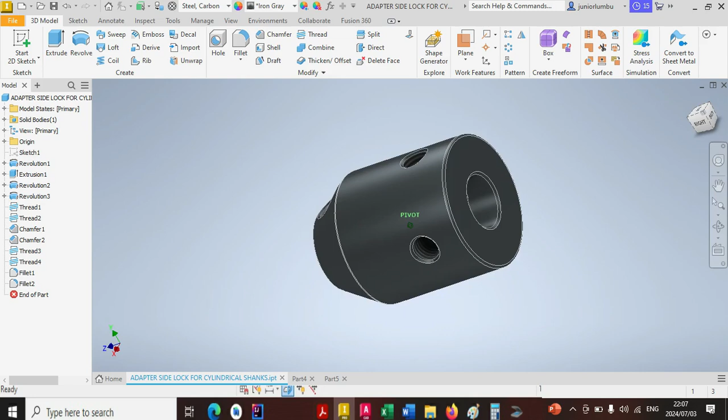Let's draw this adapter side lock in front of us. Our dimensions are in millimeters. So what we're gonna do is we're gonna come on new there. We go metric, standard millimeters, then say create.

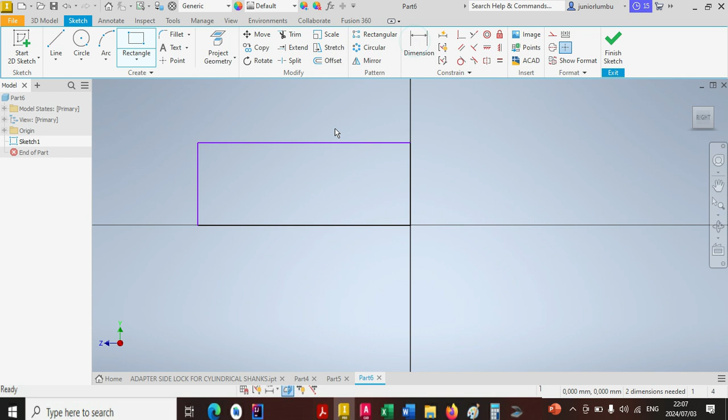In here we are going to start with a rectangle. So there is our rectangle. So from there up to there, and then we need to make sure that this one here is 40 millimeters. Good. And that one needs to be 15 millimeters.

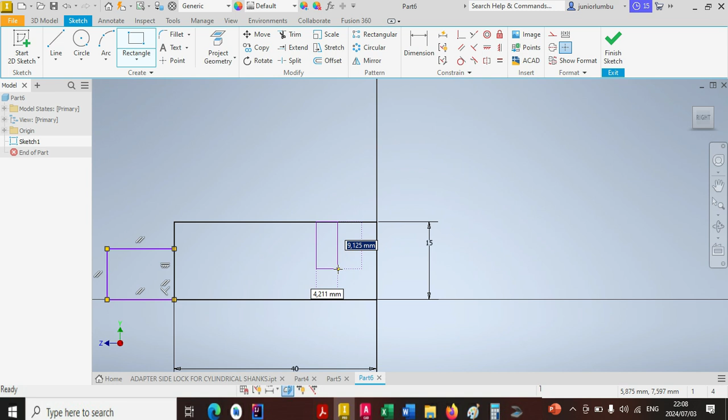All right. Now that I have that in place, I'm gonna come for another rectangle. So up to there. There is my rectangle, and another one here. There we go, without any constraint. Okay. And another one coming from here up to there. Now that I have that, I'm going to give dimensions.

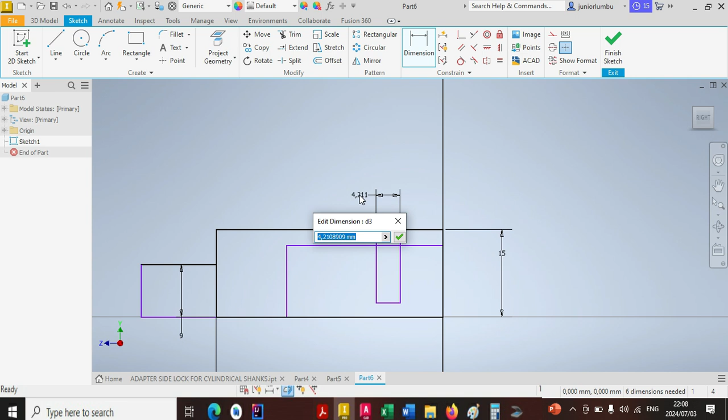So from there to that one, I need to have 9 millimeters. Okay. And this one here needs to be 3 millimeters. So 3. All right. And that one here needs to be 25 millimeters. So 25. Good. And now from here to there, I need to have 6 millimeters.

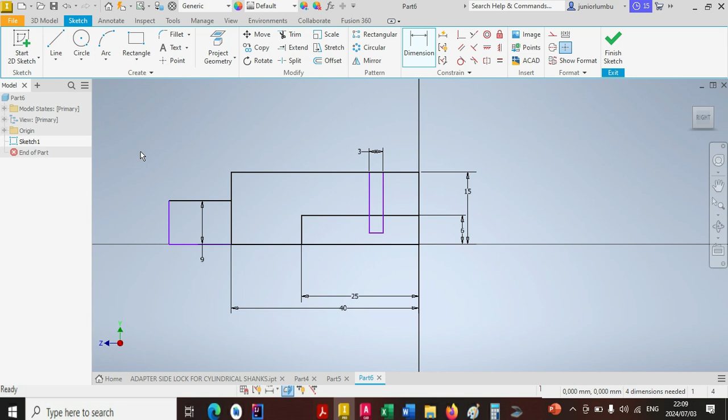All right. So now I'm gonna come for this straight line here. There is my straight line, and I'll make sure that from here to there I have 10 millimeters. 10 millimeters it is, and this one here needs to fall on that one like that. Now that I have that in place, I'm now gonna come for this

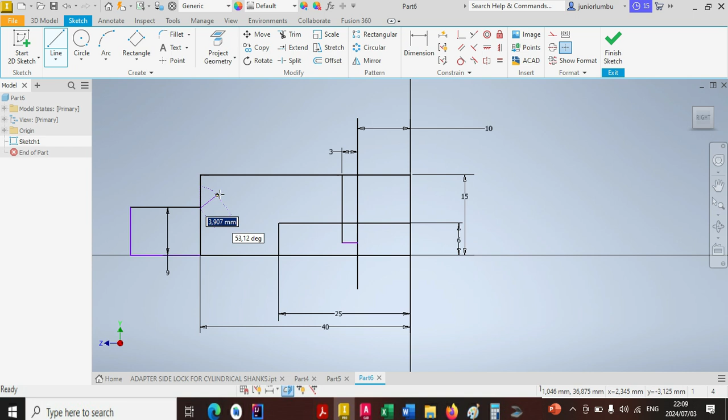rectangle here. So now first I need to come for this line, then I'm gonna come for the rectangle after. So there's my line. I'll make sure that from here to there I have 30 degrees. Good. That I have that one there, and from here to there I need to have 9 millimeters.

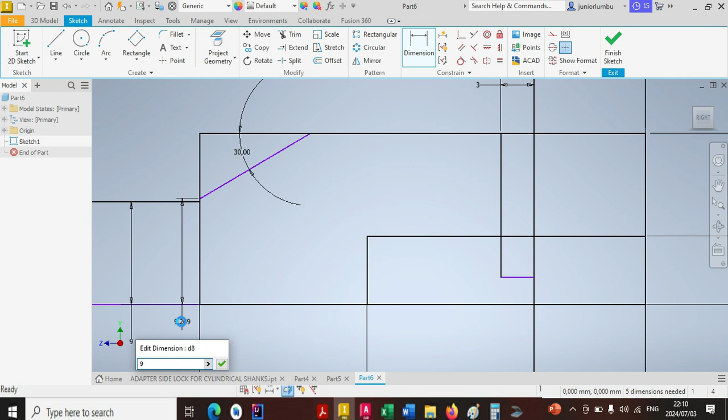Okay, that has moved up. Let's make sure that between this one and that one we have 0. Good. 9 millimeters, just like that. Okay, then I'm gonna come for this rectangle. So this rectangle is coming there. Okay, there we go, and then coming like this.

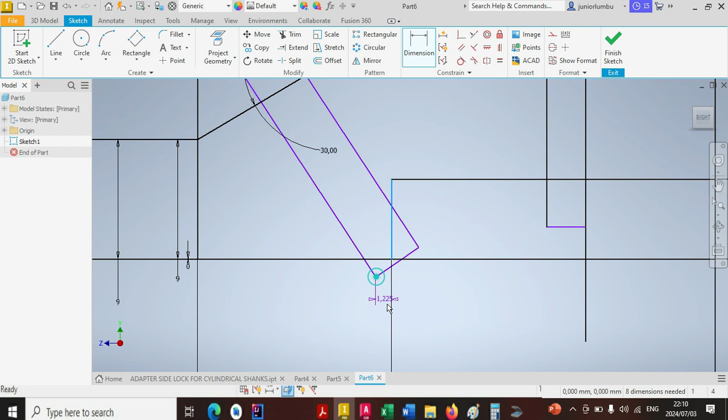Right. Okay, so this one here needs to be 4 millimeters. So 4 millimeters it is. Okay, and the distance between that one and that one needs to be 0. All right. Okay, and now the angle between this one here and that one needs to be 30 millimeters. Okay, sorry, 30 degrees. Sorry for that.

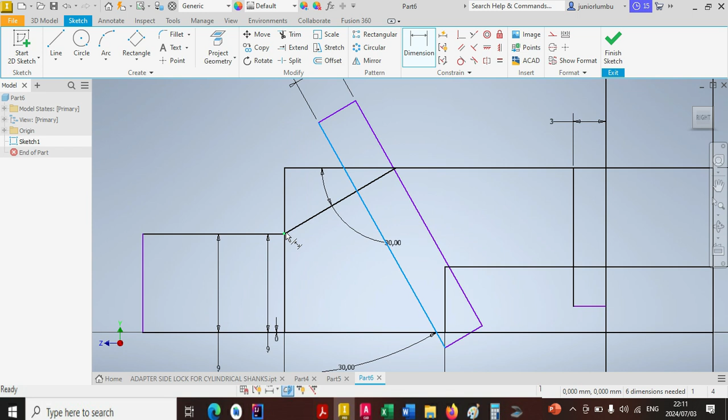And now I need to make sure that the distance between that one there and this one here is 5.5. Good. Okay, now that I have that in place, I'm going to draw this line here. The line will start, sorry for that, the line will start from there up to there.

Okay, like that. Escape. So now that I have that line in place, now make sure that from here to there, that line there is... Oh, it's already there, right? Cool, that's fine. Now that I have that in place, I'll come for this one here. I'm gonna have this arc drawn there, okay, like that. There you go. And from here to there I need to have 12. So 12.

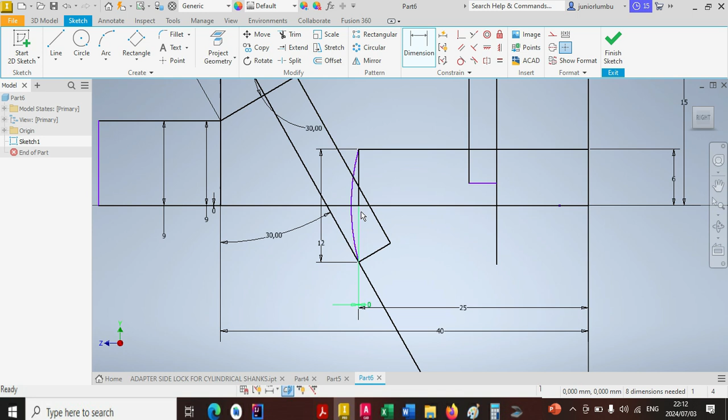Good. Okay, now that I have that in place, I'm gonna draw this line here. There is my line up to there. Then I'll make sure that the angle from here to there is 30.0. Enter. Good. So I have all this in place.

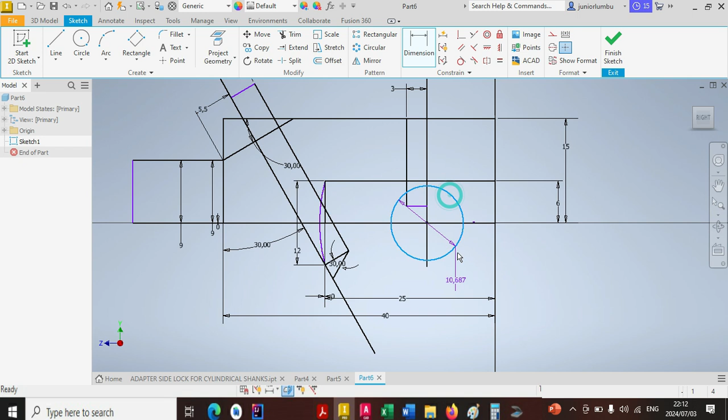Then I'm gonna draw this circle here. There's my circle, and this one here needs to be 6 millimeters. So that is 6 millimeters. All right, good. Now that I have this in place, everything is done now.

So I'm going to go on 3D model. I click on revolve. Now I want to create a hole. Okay, first I see that I forgot something. Let me draw my axis here.

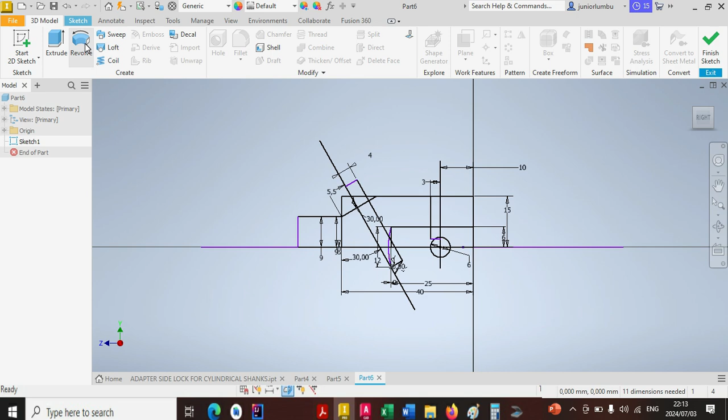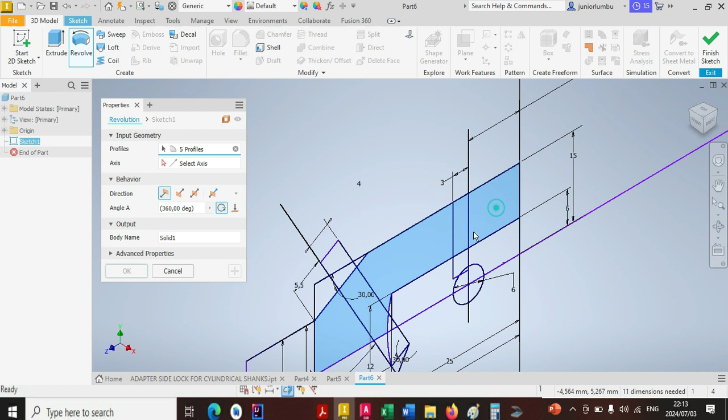There is my axis. Okay, you can as well consider X as your axis. But now we are done. I say revolve. Now I want to revolve. Remember, I want to have this hole there. Okay, so in here now what we're gonna have is, I'm going to make sure that this one is full, that one is full, this one is full. I'm gonna have this one empty, that one needs to be full, this one needs to be full, so it needs to be revolved against this axis.

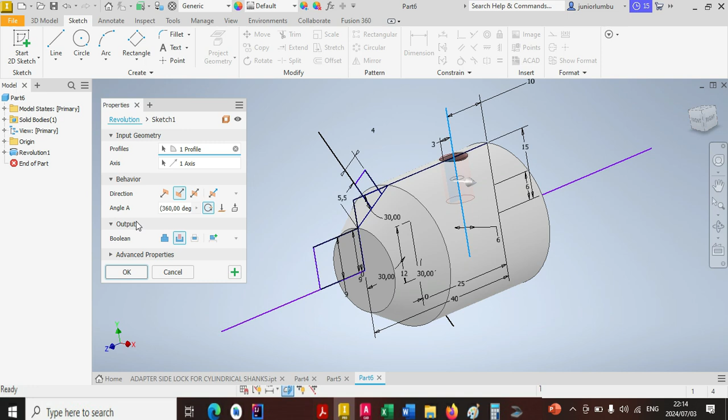Okay, after that I'm gonna say plus. I'm gonna cut this one, okay, against that axis. I'm gonna say cut. Now I have a hole there. As you can see, I'm also having that hole over there. Okay, then after that again I'm gonna say plus. I want to cut this whole thing, okay, plus that against that axis. I say cut. Now I'm having that one there. All right, I say

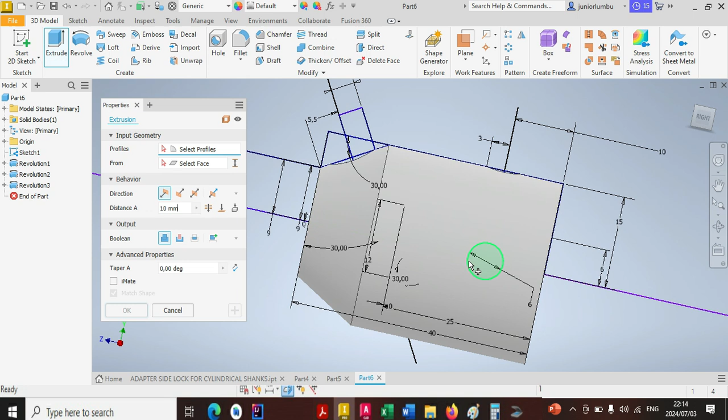okay. Then I'm gonna say visibility on. I want to have that hole over there, and I'm gonna say 3D model. I'm going to extrude that hole, this one here. Okay, both sides of my drawing plane. Then I'm gonna say by 100, you know, the biggest possible, so I can cross the whole drawing. And then I say cut. Now I'm having that hole over there. Can you see that? Then I say visibility off.

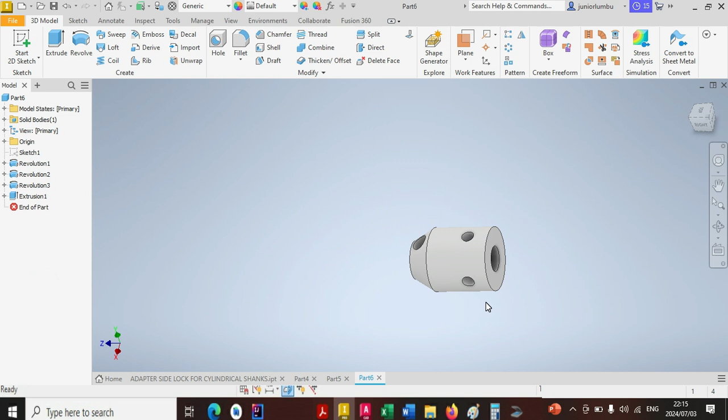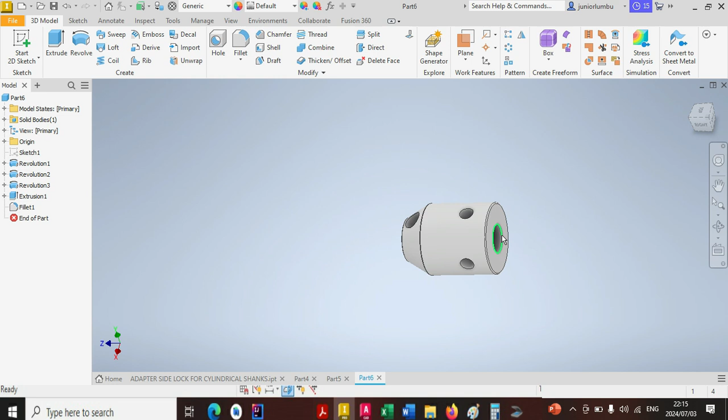After that, I'm going to create a chamfer here, okay, of 0.5 there and there. Okay, I say okay, that's not a chamfer, that's a fillet. I say okay. Then after that, I'm going to create a fillet here, and then sorry, that's going to be a chamfer now. Here, there, as well as here, there and there, okay, this side as well, of 0.5, right, like that. Then I say

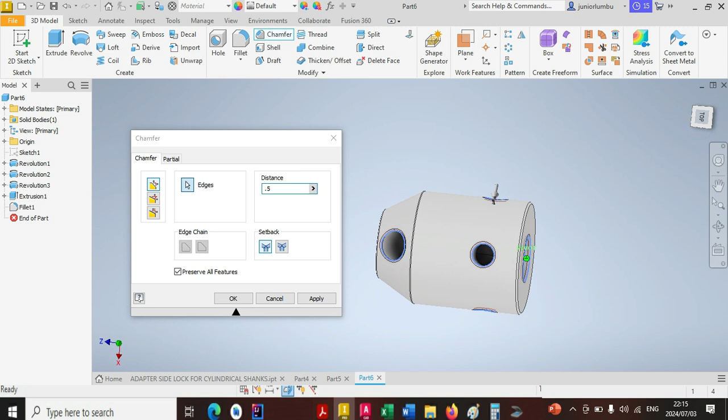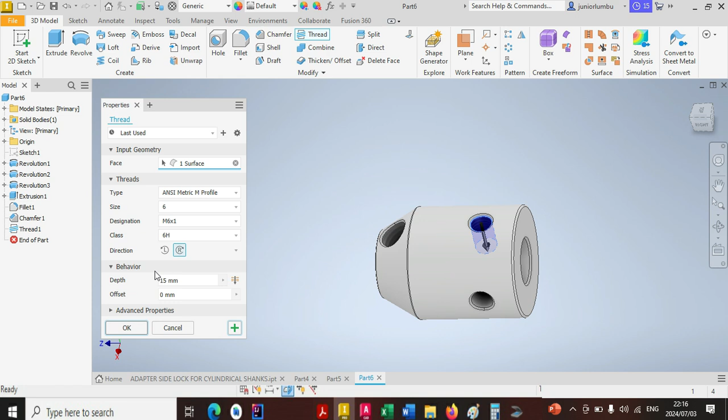okay. Then I'm gonna create a thread here, so I'm gonna have a thread here. Okay, I want this one here to go 15 millimeters. Okay with me? Okay, so I say plus a thread in there. Okay, I don't think this one goes 15 millimeters. Doesn't, so still fine. Okay, plus thread in there. Plus thread in there, and I say okay. So oh, did I put thread in there? Okay, and then I say okay.

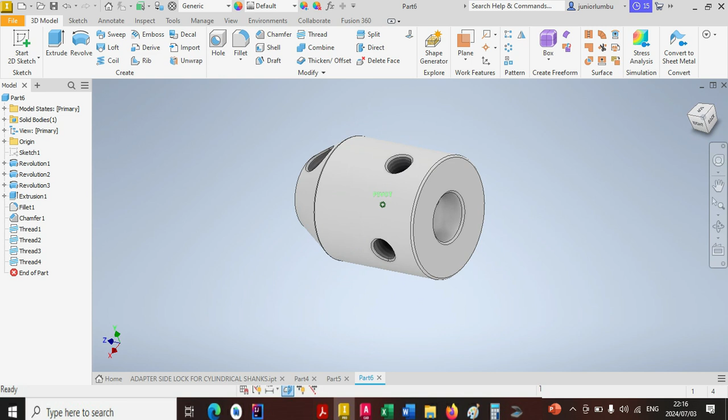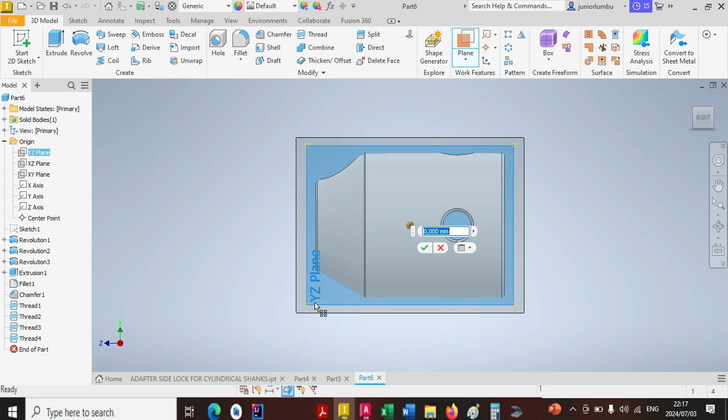So now this is how your adapter side lock looks like. So now if you want to see the shape inside of it, what you can do is you can create a plane. Okay, create a plane. So which one? Yeah, that is fine. So you can create a plane there. All right, and put 0 0 there. It's fine. And you do as if you want to create a new sketch. Okay, all right, now you slice the graphics.

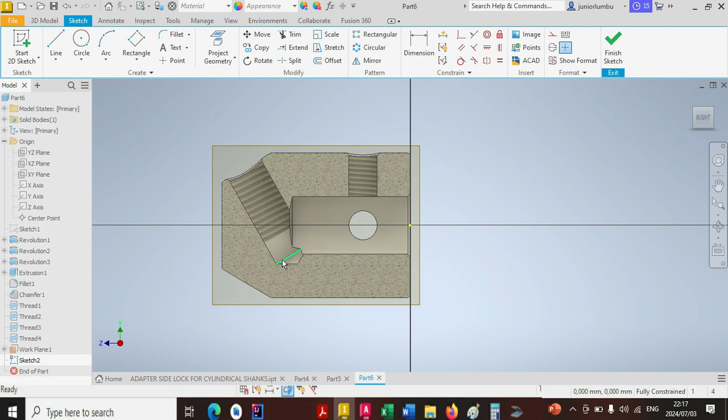Now you can see this is how beautiful it looks inside. Can you see that? You have that one there, you have your thread stopping up to there. You have that one over there. You have this one over there. You have that hole over there. Can you see that? Okay. Right. Then you say finish sketch. This is how it looks like, right? So you can remove that one over there, the plane, by doing that if you want.

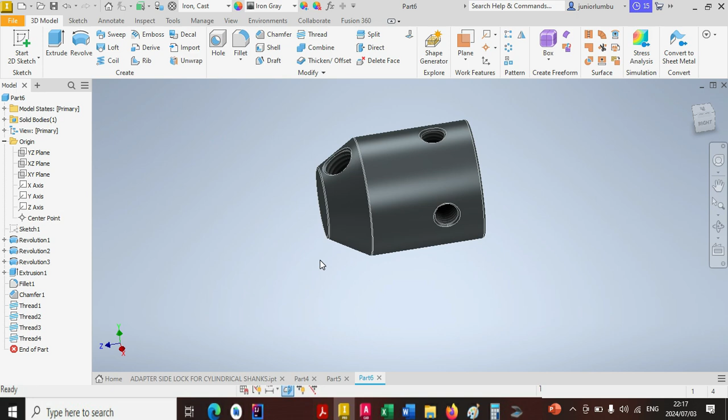So now you can give the material. So here you can come even for cast iron. What is cast iron? Yeah, that's one. Now you have your adapter side lock in front of you.